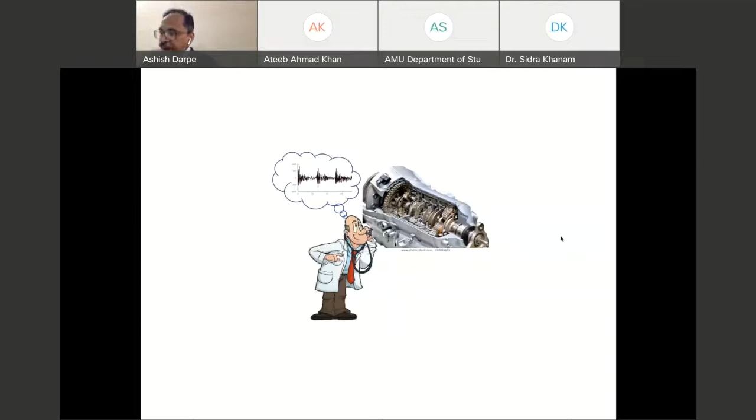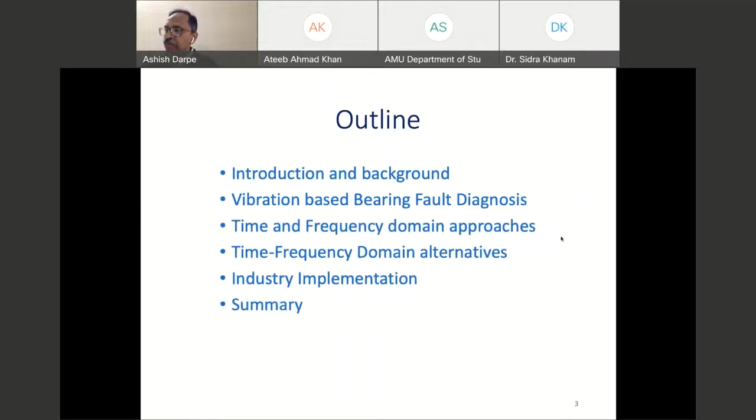I would like to upfront acknowledge two of my best students who worked in this domain and have generated such a wonderful know-how in bearing diagnosis: Dr. Piyush Shakya, who is currently faculty at IIT Madras, and Dr. Jaskaran Singh. Both of them have really put in excellent quality research work.

Okay, getting started with the introduction as to what basically the diagnosis of this element, the bearings—and in particular the rolling element bearings—is about. We will not be dealing with other types of bearings, but focusing mainly on rolling element bearings, for obvious reasons that they find application right from a simple electric motor to a rocket launch vehicle, a satellite launch vehicle. So it can be an important element in one of the most rudimentary or very simple electric machines, to a complex aerospace vehicle, aerospace structure. In the case of an electric motor, it is supporting the rotor, and in the case of launch vehicles, it could be a liquid oxygen pump or a liquid hydrogen pump, which is supplying fuel to the rocket, to the engine.

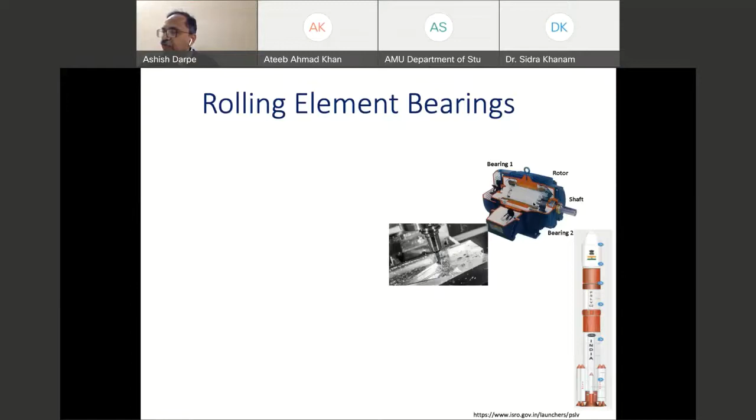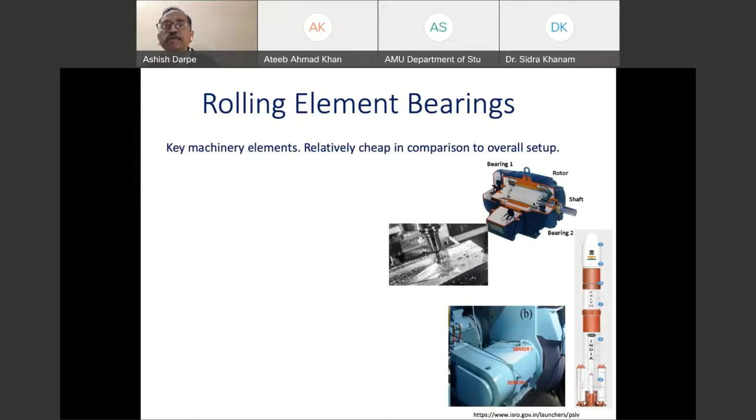It finds applications in the machine tool industry, like these two applications, the second of which we actually worked on quite extensively. In both of these, bearings form a very critical element, despite the fact that they are relatively cheap compared to the overall system cost. So despite being a key machinery element that isn't costly itself, its failure can be extremely costly for several reasons, which we will discuss.

The reason is that downtime is very costly in terms of time wasted and product quality degradation. For example, a bearing here, if it degrades, will degrade the quality of the machining. There will be a lot of errors, the machining quality will get hit, and you have more rejections. So even if it is not completely failed, it will influence product quality, which ultimately leads to added cost.

So this is one important reason for us to be careful about it.

The other important aspect of bearing failure is that if it goes undetected, it can lead to secondary damages. For example, if the bearings in an electric motor seize or stop working, it can have consequences with the coupling getting damaged, the shaft getting damaged, and so on. If one component in a complex interconnected machinery fails, it has consequences, and therefore it can be extremely damaging.

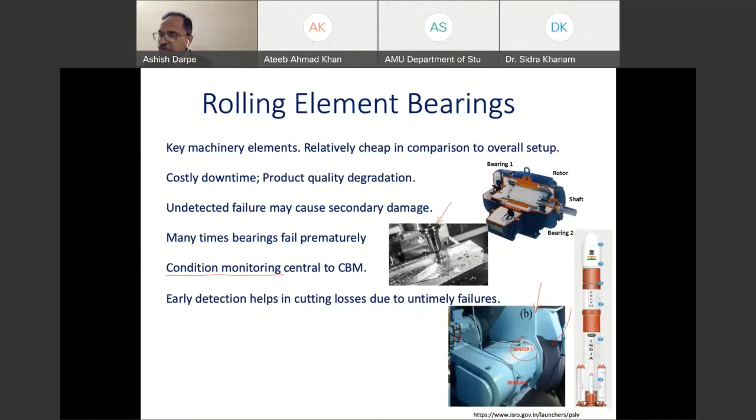We have seen that even a small scratch or a small spall can lead to a changed vibration behavior. In one of the industries we were interacting with, the bearing clearance, because of wear and degradation of the raceways, if it increases from 3 micron to 5 micron, they change the bearings. Such is the level of accuracy demanded that any small deviation from healthy condition must be detected in time.

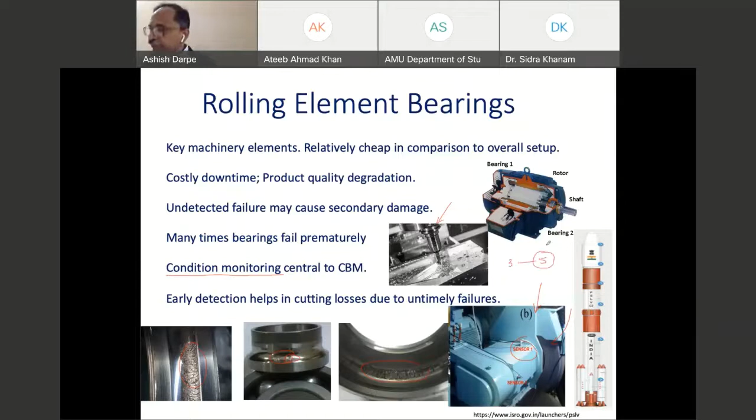So these are some of the failures that I was talking about. These are the actual pictures of the failed bearings from these machine tools.

When the cutting fluid in the coolant, during the grinding operation, enters into the raceways of the bearing, it eventually damages them by reacting with the existing lubricant and degrading it, finally causing damage to the raceways. The lubrication that is expected and designed for gets compromised, and then you have a failure. Sometimes grinding dust enters into the raceways, and even a small quantity of this foreign material is good enough to cause serious damage, leading to small pitting in the bearings that starts and extends toward all areas of the raceway.

The raceway, anyway, is a highly stressed component in the bearing, and if it starts degrading, you can imagine what will happen gradually—the entire raceway gets spoiled.

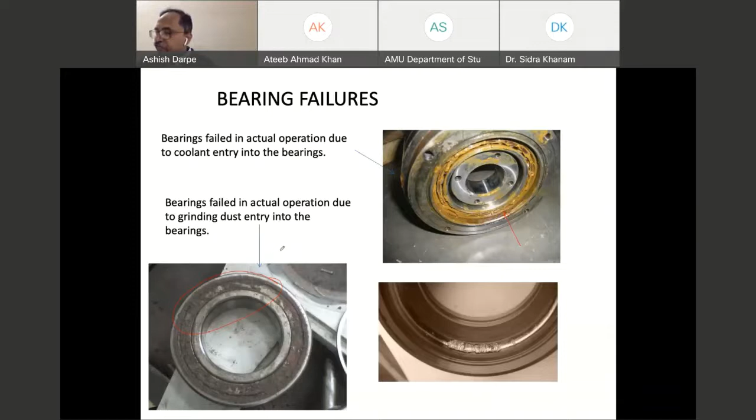One of the challenges currently faced is that if one of the bearings fails in this particular drill head, there is no way to understand which particular bearing needs to be replaced, and they end up spending a lot of time figuring out which one to replace. If they replace all of them, the remaining good bearings are unnecessarily thrown away. So if you are able to diagnose which particular bearing is at fault, it would be a great help in cutting down replacement time and cost.

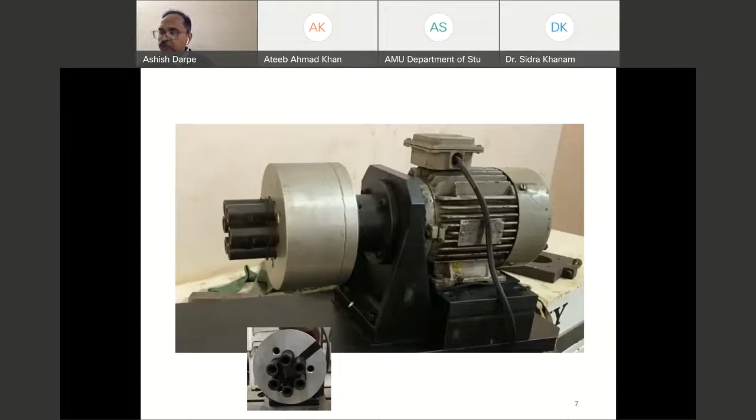So this is one of the examples that tells you how important it is to have an idea about how to diagnose.

Well, we now look at what are various condition monitoring parameters. That means when you want to monitor it, how do you monitor it? What physical parameter do you use for monitoring the bearing health?

This generally applies to most machine elements, not just bearings. You can have an aural indication—meaning you can listen to the machine element or machinery. There are many times aural indications: you hear the sound of the system and can detect whether there is an abnormal sound, a changed sound pattern, or behavior, which can lead to detection of an anomaly in the system.

In case of bearings, particularly in automotive garages, the mechanic listens to your vehicle and can tell if there is a changed sound pattern. With experience, he can immediately catch whether the bearing is at fault. In fact, if the bearings are degraded to a sufficiently high level, even a layman can figure it out. So there's nothing great about it, but if you want to catch it early, expertise is definitely required.

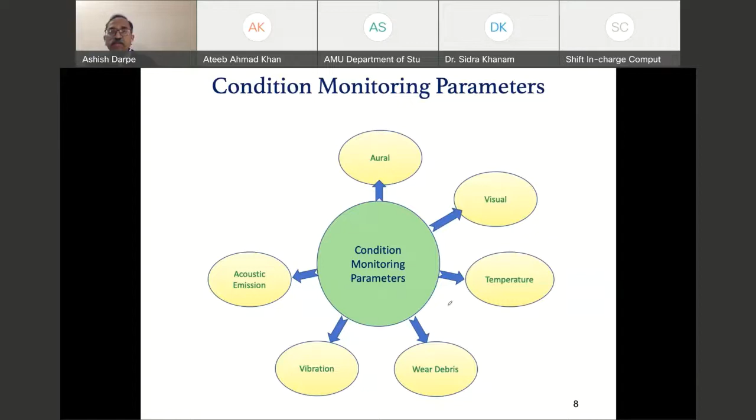So there are issues with this, but then articles will vouch that they are better than vibration parameters. So those are also the options available for you.

Finally, although I am putting this as one of the parameters, it may not be so relevant with rolling element bearings, but as a general condition monitoring parameter, operational variables can also indicate issues. For example, if you are monitoring the health of a pump or a compressor, the outlet pressure, temperature, or the power delivered are operational variables. Changes in them can indicate some anomaly in the system.

But as far as bearing health is concerned, these are the major parameters of interest. And out of that, if you look at the overall convenience, cost, and the sensitivity to a small change in the damage level, vibration is almost like a de facto parameter.

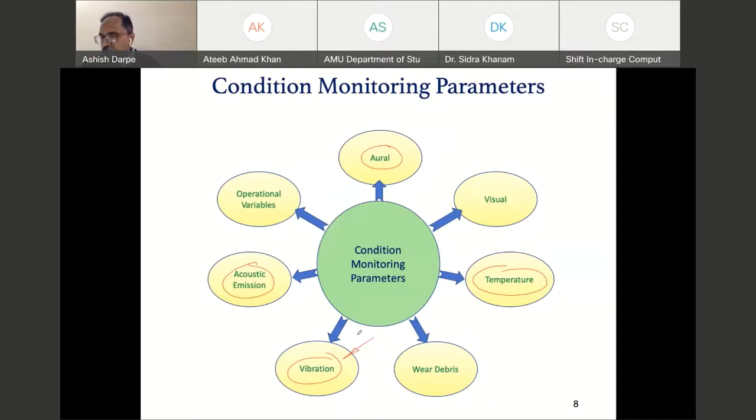Nowadays, sensors can be as cheap as 20,000 to 25,000. And despite the initial investment, they are so well established that they are long lasting and can survive the industrial environment, giving excellent output and sensitivity.

So having discussed why vibration is an important parameter to monitor the health of the bearing, I would like to dig a little deeper now and understand basically why vibration is something which is getting changed here.

So I'm trying to draw a parallel with a vibratory system, and we'll take the simplest machine, which basically has a bearing on both sides of the rotor. The rotor is basically supported on two bearings.

If we treat this rotor as a simple vibratory system, which we typically model like a spring-mass-dashpot system, why should minute changes in the bearing health change the vibration pattern?

Typically, if you model this rotor and bearings as a vibratory system, wherein the shaft and the rotor can be modeled as a mass, all those who have done a basic course in dynamics in mechanical engineering will agree that it is a simple spring-mass system, or can be modeled like one, with the stiffness here representing the bearing stiffness.

If the bearing is having some stiffness, that stiffness can be the bearing stiffness. Damping can arise out of the shaft internal damping or the fluid in the bearing. Of course, it is well established that bearings offer very little damping, but as a matter of completeness, this spring-mass-dashpot system representing the rotor supported on bearings is shown here.

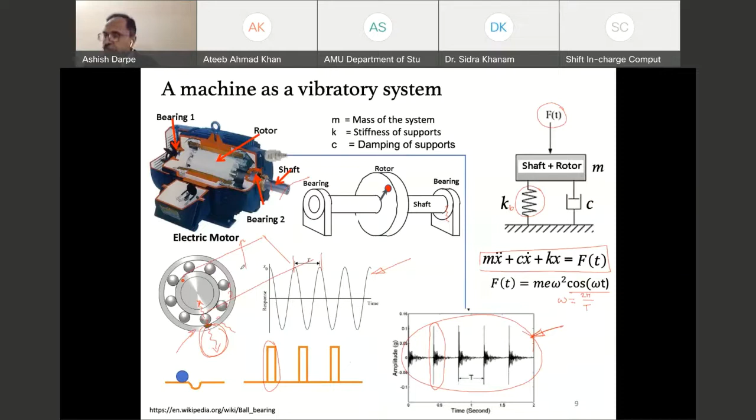Now the question is, suppose we also need to look at whether the fault is in the outer race, the inner race, or in the ball. You may check that this star you see on the outer race, if it represents a flaw in the outer race, as the balls roll past this flaw, there will be repeated impulses in the response, captured by a sensor put here. Or if the flaw is here instead, then as the balls roll, they will also interact with this.

And if you notice the frequency, the frequency with which this defect interacts with the balls is going to be lower compared to when the flaw on the inner race interacts with the rollers. That can be geometrically proved. In fact, there are expressions derived which tell you how much would be the frequency of repetition of these impulses when the defect is in the inner race versus the outer race.

So there are more interesting things between inner and outer race. Although theoretically, whether the defect is in the inner race or the outer race, if the defect is of equal magnitude, you expect to have a similar level of impulses generated.

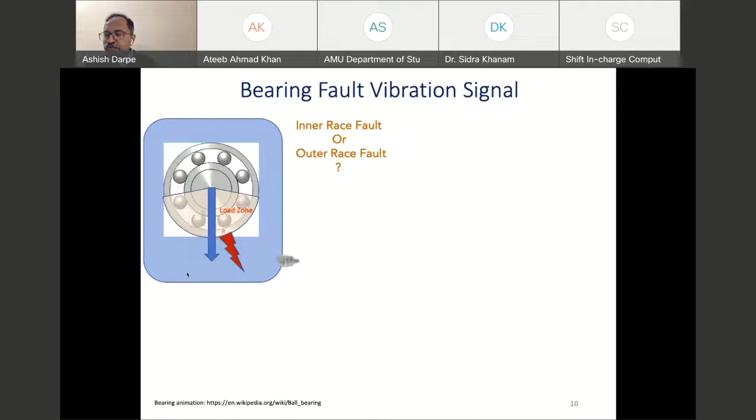So if the defect is on the outer race, because the outer race is fixed, and it is in the load zone, it will generate significant strong impulses. You may imagine that balls which are already compressed and stressed to a large value, as they pass through this defect on the outer race, with a sensor sensing the vibrations of the bearing housing, it will record impulses equal in amplitude, because the position of the defect is at the same load, and therefore you expect almost similar strength impulses.

However, imagine that the defect is moving with the inner race as the inner race rotates. Again, that is one of the most common things, that the defect in the inner race is rotating, because the inner race always rotates, while you typically always have the outer race fixed in the frame. So in this case, when the inner race defect, which is moving, is in the load zone, you get strong impulses generated.

But when this defect moves up and interacts with balls which are already relieved, it will generate a very low or no impulse at all. So compared to the strong impulse, you'll have a much lower impulse here, and that lower impulse sometimes may not even be generated, giving a situation very different from the outer race. So typically, because of the movement of the defect from the load zone to the unloaded zone, the impulses in the unloaded zone are much feebler compared to the impulses in the load zone, if the defect is in the inner race.

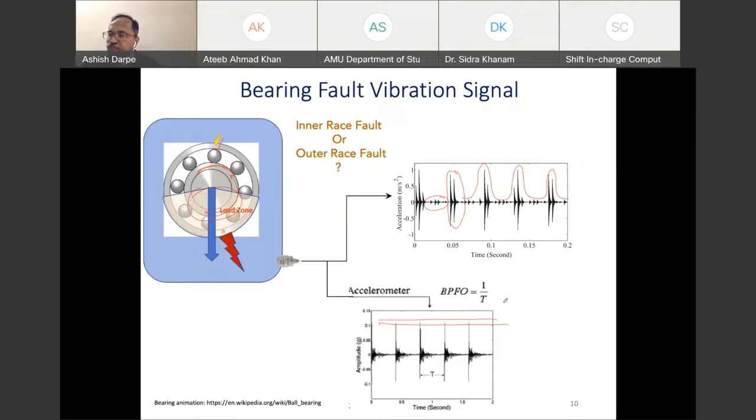Now, what are the various identification measures? We have been thinking about what is causing vibration to generate. The bearing, rolling element bearing elements interact with the flaw, and that generates impulses. Those impulses occur periodically at a definite interval of time, and all that can lead to a specific vibration signature. That signature needs to be tracked and identified from the overall vibration that is generated.

You must make a note that when you put an accelerometer on the frame of the motor, it's not that you will get a pure signal. It will also catch in parallel, simultaneously, other vibration sources, like the frame itself vibrating at its own frequency, and so on. But if you know the signature, you can extract those features.

Now, what are the metrics which we use for identifying problems with the bearing? One of the most simple ones is to find out from the time domain data the RMS value or a peak-to-peak value of the signal. We will discuss that in the next slide. There are other parameters like crest factor and kurtosis, which can be used for tracking the health of the bearing. We'll discuss that again very shortly.

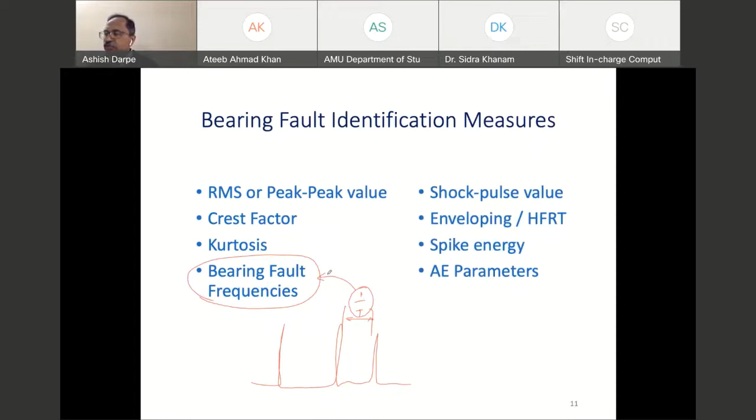So when you want to analyze the vibration signal, you can use different techniques for its post-processing and representation, so that the diagnosis becomes easier. You can unravel, dig out, or extract features very specific to bearings, removing some of the other parameters or influencing sources. So the most common one is the time domain, of which some of the parameters like RMS, peak-to-peak I have already mentioned.

So if you want to find out the metrics from this time domain data, maybe I will figure out what is the peak-to-peak value of this time domain data, or I can find out the RMS value of this time domain data. I can also find out the kurtosis value and so on. There are many other parameters which are typically used. That identification is relatively much simpler than the other parameters shown here in this picture.

Because if you want to convert this time domain data into frequency domain data, you need some algorithms to compute it. Although not rocket science, you can always do it using standard codes available. The reason for getting frequency domain data from the time domain data is some issues with the time domain data - it does not offer you detailed insight into what is the composition of this time domain data.

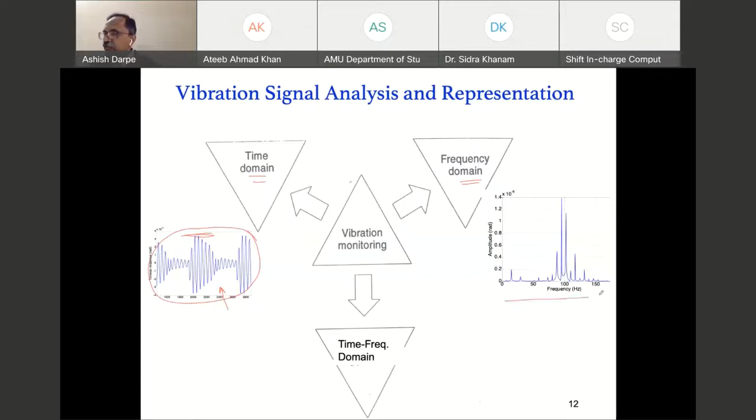It only tells you the overall level of the signal - how much is the strength of the signal as such. But if the signal changes slightly, it is hard to figure out what is the culprit or what is changing it. However, if you represent the same signal in the frequency domain, you precisely know which frequencies are there.

So the kind of repetition rate that I talked about of the repetitive impulses is directly linked to the kinematics of the fault. Therefore, if a specific frequency like 1 by T is present in the signal - for example, if this frequency represents the defect characteristic frequency of the outer race - I know that there is some issue with the outer race, and if this amplitude grows over a period of time as I keep tracking, then I can be sure that there is something wrong.

Now, if there are other more dominant frequencies present in the signal, which are typically not related to the defect and will remain static, even if this changes by 2 times, the overall peak-to-peak value may not change as much. Therefore, it would be difficult to track the progress of certain high-frequency components. And therefore, frequency domain technique is important for us.

The reason for this is because the fault signature, as we call it, is typically through this frequency composition. And if we have specific frequency components shown up in this frequency domain data, then identifying a given fault becomes easier.

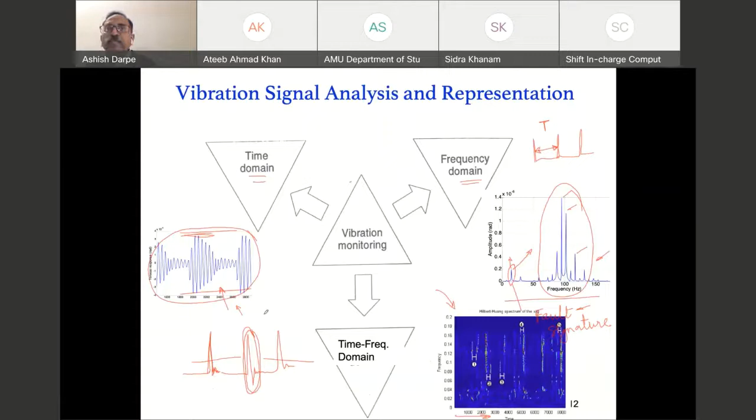As I said, a typical time domain data from an actual machinery is shown here. We can see that apart from knowing the peak-to-peak value of close to 6, it really does not offer much information, except that there is impulsive data in it, but it's hard to extract any further information.

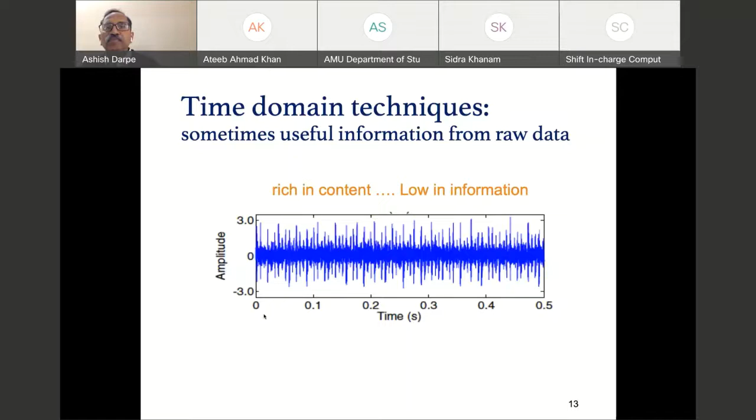So typically what is talked about in the literature is the time domain data being the raw data. It is rich in its content. It has all the information hidden, but that information is apparently not obvious from only the time domain representation. So we need to process this into other domains to extract useful information.

So the output of processing this time domain data to extract some metrics to quantify the signal is like this: you can use the expression for the RMS, and all of you are aware of how to find the RMS value. This is the root mean square value of the signal, which overall quantifies the energy level of the signal. It can be a useful parameter to track the health.

In our lab, in one of the units where we first started exploring vibration data for health monitoring, running that rig for a long duration in the heavily loaded condition resulted in the RMS showing this kind of a trend. So the simplest of these parameters that you can think of in bearing health was able to show a reasonably upward trend before the bearing actually almost failed. It can be used for tracking the health of the bearing, except that for more than half the period, it stayed almost close to a static value.

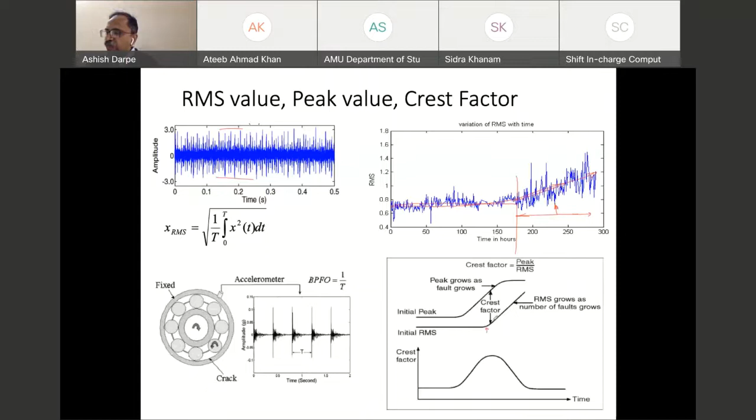It has been found that if you track the peak value, it grows faster than the RMS. So if you take the ratio between peak and RMS, that ratio, or magnitude, becomes higher at a much earlier stage than what RMS shows. RMS grows as the number of faults grow, and the peak grows faster. This ratio, crest factor, was touted as one alternative for early indication of faults in the system.

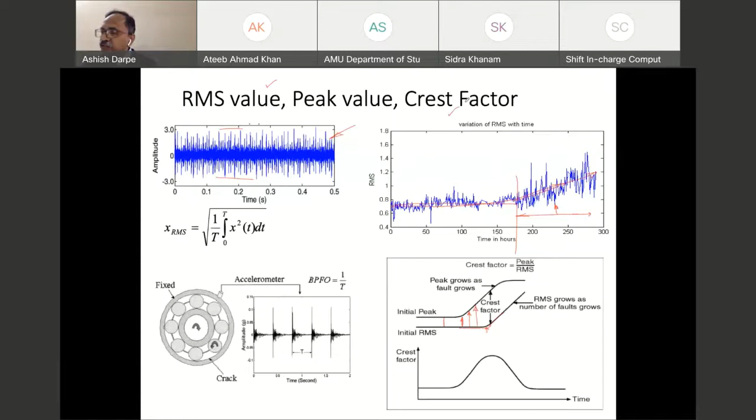So from the time domain, using pure time domain data parameters, you can use RMS, peak, or crest factor. These are the common ones. Another important parameter from the time domain data, without converting to frequency domain, is kurtosis. Kurtosis basically quantifies the peakedness or impulsiveness of the signal. If you have short duration spikes in the signal, it gets properly captured using kurtosis.

It's a statistical parameter, a fourth order moment. You can find this out by taking various samples of the response at different instants of time, and taking the fourth order moment of the deviation from the mean value, normalized with the standard deviation.

This particular parameter captures the impulsiveness, and therefore can be used for faults such as localized faults or characteristics in the bearing. Because such localized faults generate impulses in the time domain waveform, this parameter is found to be theoretically much more sensitive compared to RMS or peak values.

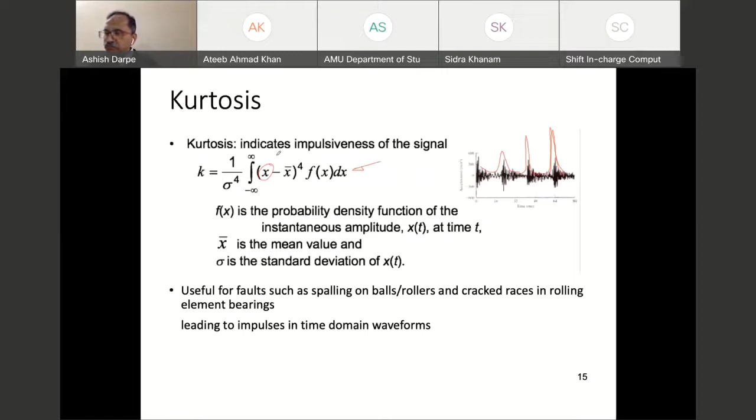Theoretically, one can show that this value is less than 3.5 for bearings with normal signal, and the moment the peaking starts, it deviates and goes beyond 3.5 for flawed bearings.

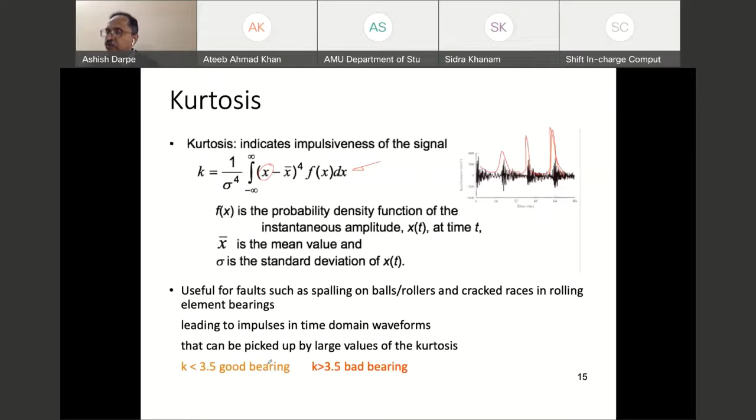However, one of our students, Dr. Jaskaran, has shown through simulation that all is not really perfect for kurtosis, because it also depends on several other factors and can give erroneous interpretation. For example, if I take a single impulse for the entire time duration, the kurtosis value is almost close to 191. If you have these impulses repeated in the same time span, the kurtosis drops to 20.5.

So there has to be a distinction between the number of impulses, and the time sample should be properly taken. If you have double the signal level, meaning the impulse has larger levels, you don't gain much in the kurtosis value. The peak amplitude growth does not really respond in the kurtosis.

If one of the impulses has a sudden change, maybe because of shock loading or other disturbances, that completely changes the kurtosis value. This signal and this signal are identical, except one of the spikes has grown to double or a slightly higher value. With one of the spikes almost double the amplitude, the kurtosis suddenly changes.

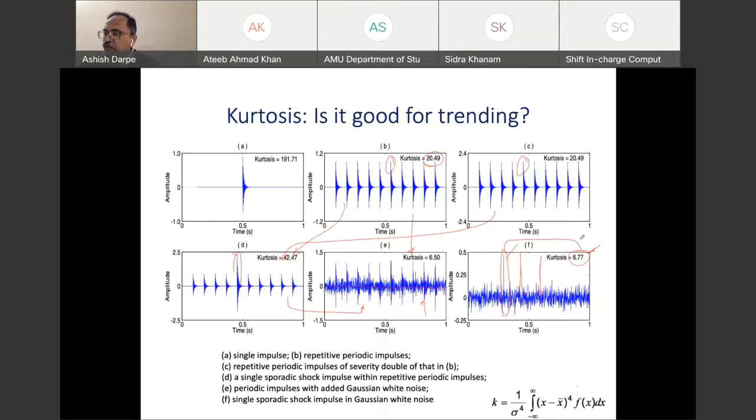So these are some of the issues with kurtosis, and it should be carefully used. But otherwise, theoretically and fundamentally, it is a very nice statistical measure of capturing the peakedness or impulsiveness in the signal. The only thing you need to do is take care of possibilities where the values can get skewed. One possible alternative is to clean up the data, and also take average values over a longer period of time, so that sporadic impulses or other disturbances are averaged out.

In one of the literature, experimental data showed that although the peak-to-peak vibration value gradually increased, kurtosis showed a much steeper, more sensitive evolution. But at the same time, as we discussed, it started dropping after a certain level of damage. So it's not a monotonous indicative parameter.

That actually dropped as time progressed. This is because if you have a small spall, crack, or other anomaly on the track, as long as it's a localized fault, these flaws initially generate very large impulsive signals. But in bearings, the sharpness of these edges will eventually get tapered off, and you might not generate as strong and sharp impulses as in the initial phase. As damages wear out and become less sharp, or become distributed across more locations, the kurtosis value will eventually decrease from a higher value. The literature has shown this through experimental data. So you need to be careful in using kurtosis.

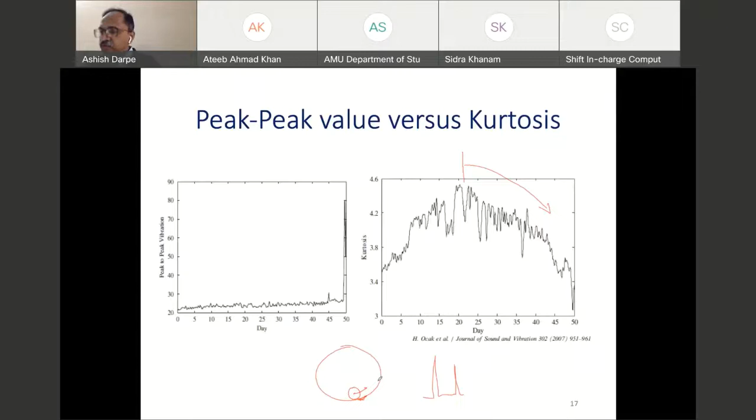Then there's the alternate spike energy measurement, also known as the shock pulse method. The idea is that these impulses generate sudden impulse excitation to a vibratory system. The housing in which the bearing is housed is itself a vibratory system, because this entire box has certain mass and stiffness. Not only do these impulses excite resonances in this housing, but the sensor sensing the vibration can also respond, since a vibration sensor itself is a vibratory system.

This vibratory system has a higher natural frequency, more than about 20 kilohertz. These high frequency, very short duration impulses excite resonances either in the supporting structure, the housing of the bearing, or in the accelerometer itself. So what's typically done through these measurement approaches is they filter out all the low frequency components related to rotation effects or other non-linearities. Low frequency data is filtered out, and you keep only the high frequency regions, which could be several kilohertz. All general rotational related frequency components are less than 2 kilohertz, and often within a few hundred hertz.

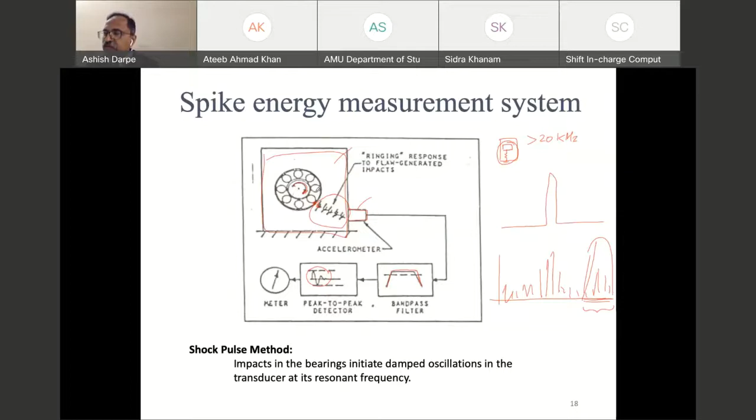For example, 2400 RPM corresponds to 40 hertz of signal. If it's rotating at that speed, the unbalance in the blower will generate a certain unbalance-related excitation frequency, related to its own operation. If the bearings supporting the blower rotor are loosely mounted, that will generate a signal typically at twice the rotational speed. If the blades have issues, the blower will generate what's known as blade pass frequency. So certain time domain data will have its own frequency characteristic. If the bearing is damaged, a damaged bearing will have its own specific frequency signature.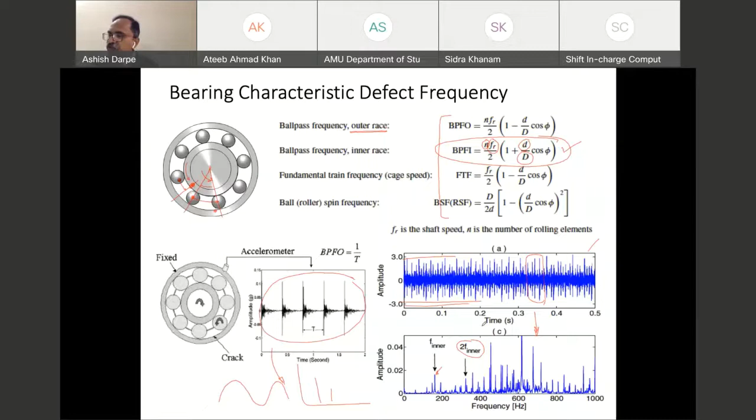So from the time domain data, by using frequency domain conversion, I can get the picture clearer as compared to what it is in the time domain. And then if I keep tracking the amplitude of this frequency, I can, over a period of time, check whether the defect is growing or is static, or how it is progressing. Based on that, I can take a call on whether the bearing is further degrading or not.

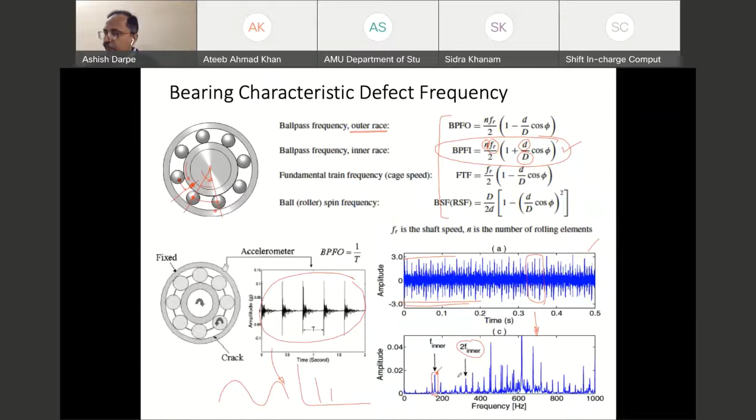So this is another data that I have taken from one of the test setups.

So as I said, from the time domain data, I can definitely get some idea about whether there is a healthy condition in the bearings or not, and also understand if there is an issue here. Interestingly, despite such periodic impulses, the defect has not really resulted in a very strong defect frequency. So its components do appear, but relatively low in their amplitude. So getting the frequency domain data itself may not always help.

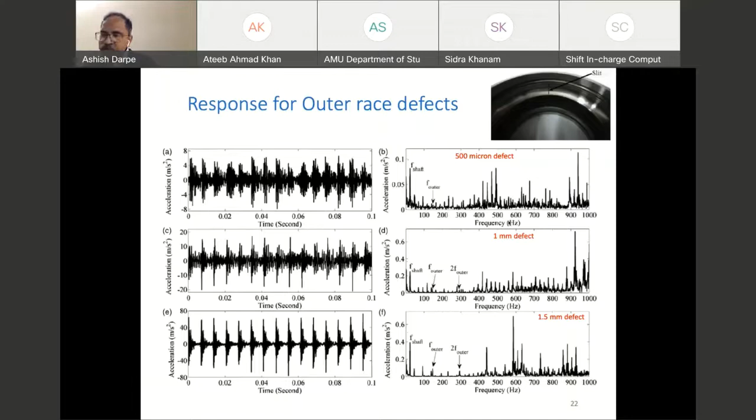And that frequency domain of this envelope signal gives me a very distinct, clear presence of the outer race defect frequency. You can see how clean the frequency spectrum looks, in contrast with the very polluted spectrum which had so many frequency components. The actual defect frequency gets buried in that signal. So using this high frequency resonance technique, I get a much clearer picture and better information of the defect in the bearing. That's what I have got here.

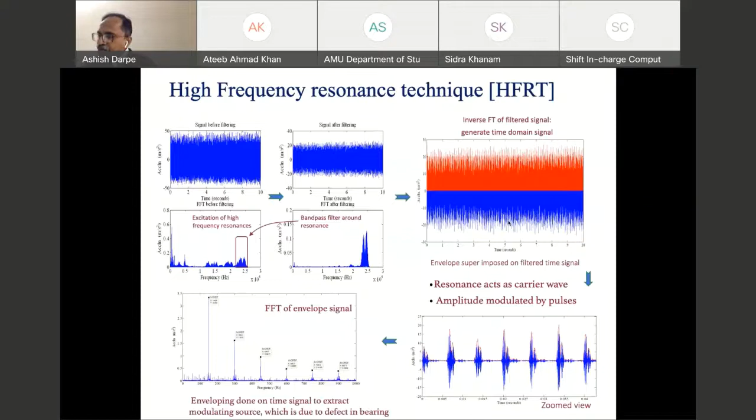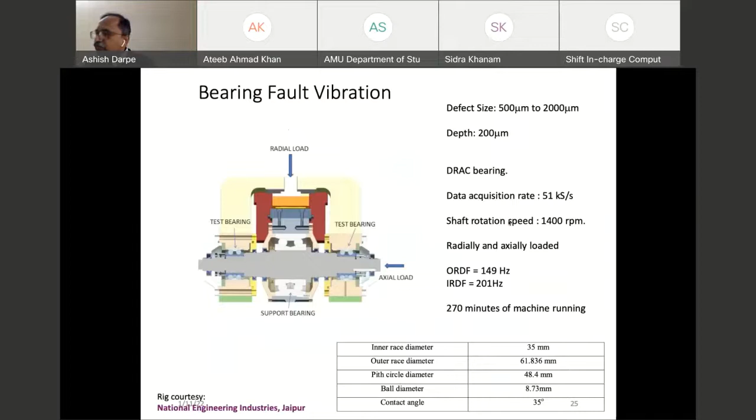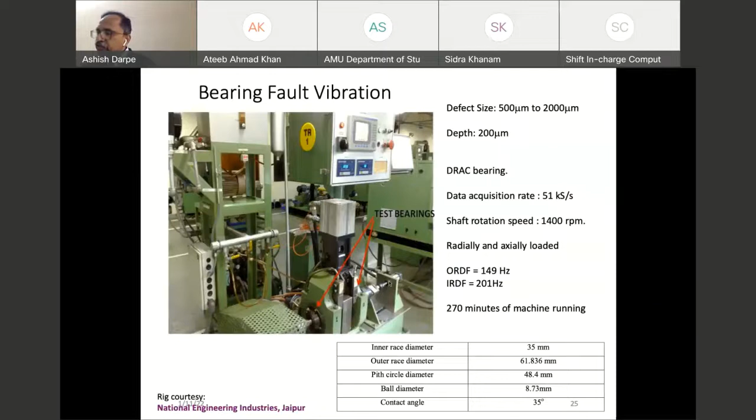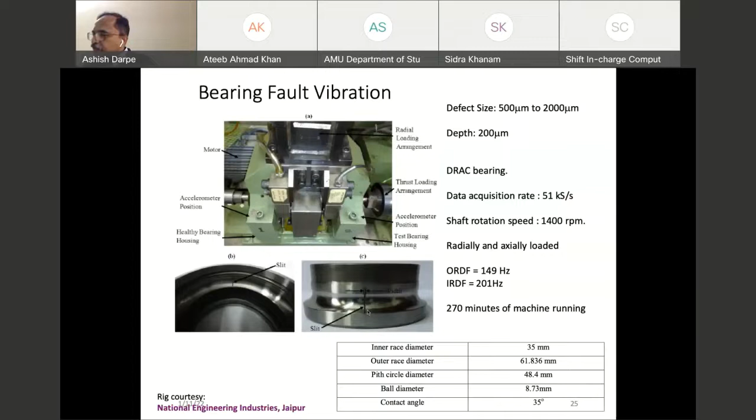Okay, so this is what is known as HFRT, or the enveloping method. Now we applied this enveloping method to actual test data, working with one of the industry bearing manufacturing companies, using their accelerated test setup for seeding defects in measured quantities so that the output can be correlated to the defect size. These bearings were placed in housings and tested, with vibration sensors placed, and defects seeded in measured quantities, with different levels of damage tested, for both inner and outer race defects.

Then you can get the data. So we first started with time domain parameters. You can see that as the damage size increases, there is a gradual rise in the RMS value. The RMS value does show a rise as the damage increases, but the initial change is very marginal, and only with very large values does it pick up. The same happens with kurtosis.

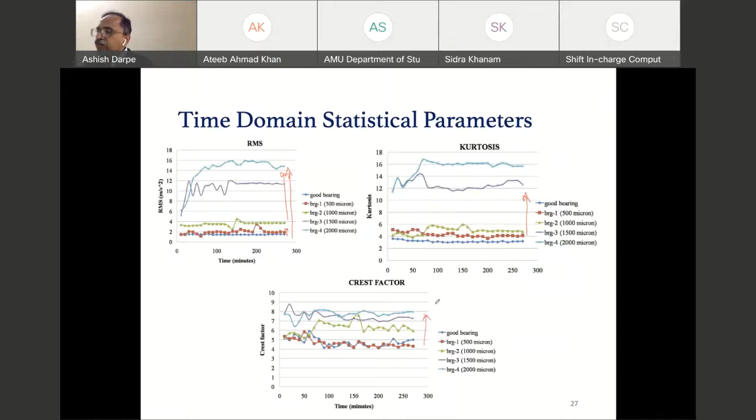It grows a lot. Crest factor was not so significantly changing, but it was also plotted, and you can see that as the damage increases, there is a distinct increase in its value. So the time domain data also can be used. How sensitive it is, it's a matter of question.

Now, we also looked at the frequency spectrum of the healthy bearing. Every time, if you only look at the defective bearing, it can lead to incorrect interpretation. You should always keep on comparing it with the healthy bearing. So this is the data, the frequency domain data of the healthy bearing. What you notice here is...

Many harmonics of the rotational frequency. This is the rotational speed related frequency. Harmonics of them do appear in the spectrum. It is expected in reality. The bearing itself is a highly nonlinear element from the vibration viewpoint, so there will be some higher frequencies which will always generate.

But the defect frequency, except the outer race defect, is not expected, and it does not appear. So these are the spectrum for the outer race defect in the full span, 0 to 25 kilohertz. Let me just tell you, the outer race defect frequency was close to 150 or so. So that is really not there in the outer race defect, in the healthy condition. No defect frequency appears here.

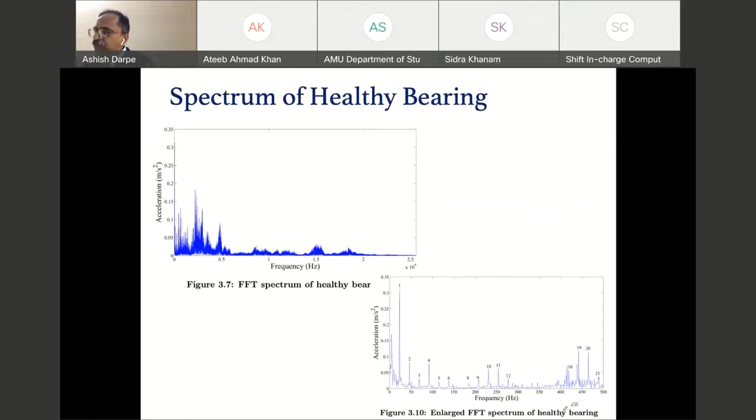When we change the defect size, look at these progressive increases in the defect size. What you can notice is all the y-axis limits are identical. What can be noticed very clearly is the energy at high frequencies is almost non-existent here, and there's a very large resonance region here. So the energy slides into the high frequency region as the bearing deteriorates. This has been mentioned in the literature, that higher resonances are excited as the defect grows. You can see that gradual increase in these high frequency regions is quite well noticed here.

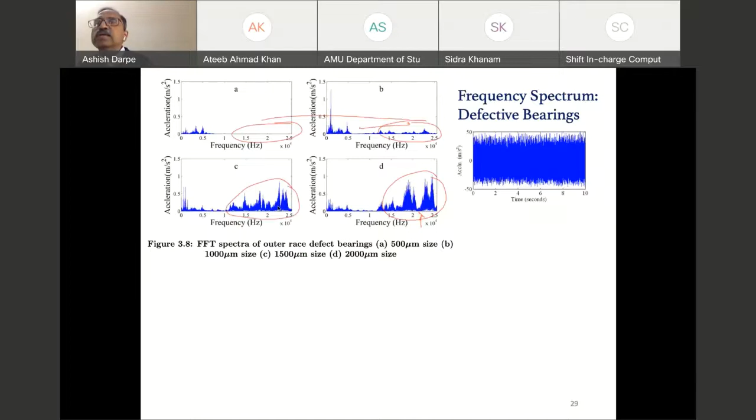And the same happens with the inner race as well. Therefore, HFRT can be quite nicely applied here, wherein you can identify these resonance regions and apply bandpass filtering and all subsequent processes.

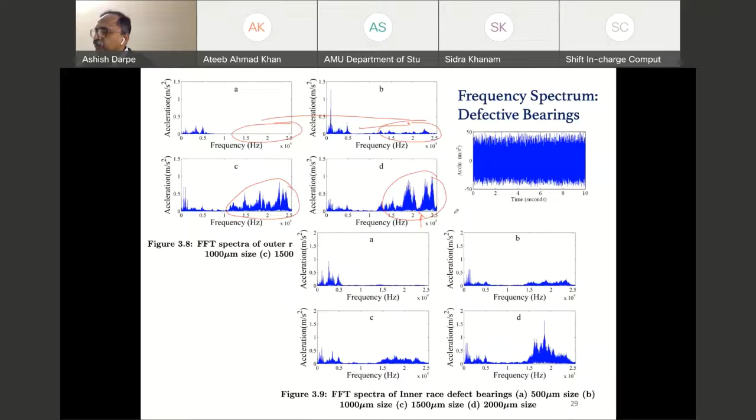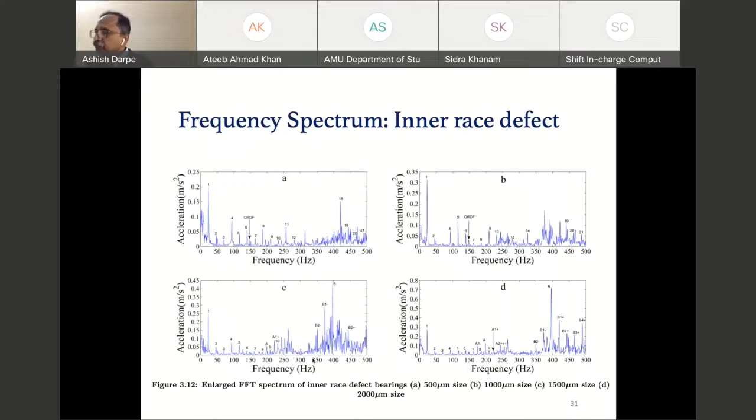Same is with the inner race. You can see that the inner race defect frequency, like this A, is appearing, but they are all of lower order of magnitude. This is something very interesting to notice, that in practice, the frequency domain data may not be as expected or as clean as you expect it to be.

For the inner race defect, we get reasonably clear data, but what we observe is that other frequencies also clamor for attention. But then you should also understand, as we discussed right in the beginning, that for the inner race defect, the impulses get modulated as the defect goes from the load zone to the non-load zone. What you are observing here is very rich modulation features, which are actually indicative of the inner race defect, and it's actually useful for fault classification also.

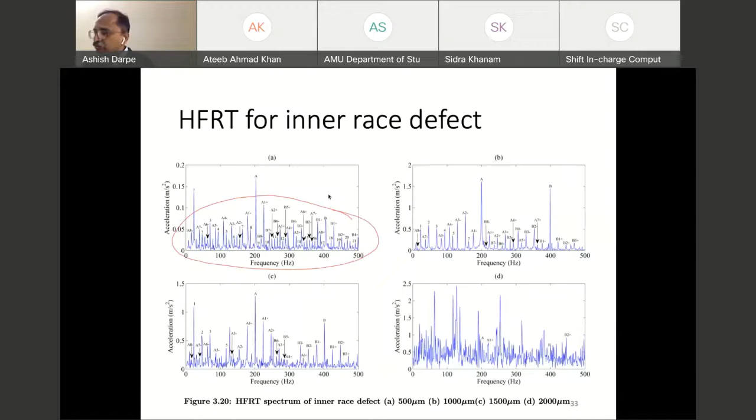So when I say inner versus outer race defect, for the same defect level, this is the difference between the outer race and inner race, which is actually because of this kind of modulation in the strength of these impulses in the inner race, and the absence of it in the outer race. This is something very nicely captured here from the actual experimental data on the lab setup. The modulations on the amplitude of these impulses, because of the migration from load zone to non-load zone, is actually reflected in the side bands which are created or generated.

So you have B minus and plus. This is the defect frequency, and this also is the second harmonic of the defect frequency. This is the first harmonic of the defect frequency, and this is separated by the sidebands which are due to the modulation. The difference between these two is the rotational speed.

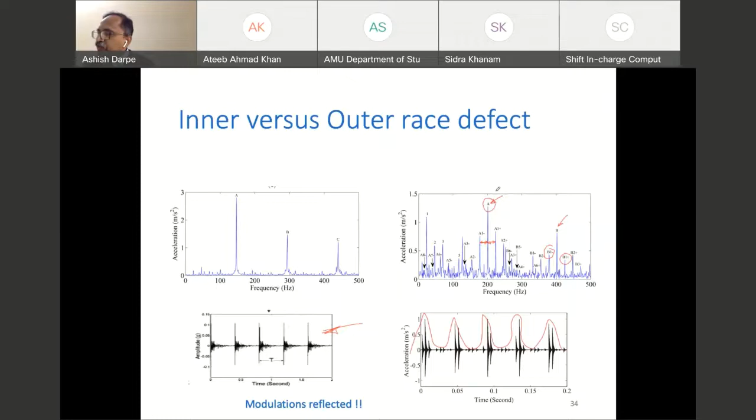The sideband generation is a very typical signature of the inner race. So from the HFRT data, you can actually diagnose whether the defect is inner race or outer race. Of course, the frequencies themselves tell us whether it is inner race or outer race, but the modulation character also is a second level confirmation that the defect indeed is the inner race.

Then we made a comparison of all these parameters we investigated for how sensitive they are to the defect size. So what we plotted is the increase or not of these parameters. We ran for a particular defect size, and we ran it for a large period of time so that we get a very large set of data for the same defect size, so that we expect a more or less equal value when we run it for a larger period of time. And as we increase the defect, we check whether this amplitude grows, so that we can say the parameter is sensitive to defect growth.

For that purpose, all these investigations were carried out. You can see peak and RMS, both of them are growing nicely with the defect. The crest factor is not as sensitive. Kurtosis, yes, it showed because all the time the defect was fresh. But the defect frequency from the FFT was not really sensitive, you can notice here. In fact, it dropped for very large values.

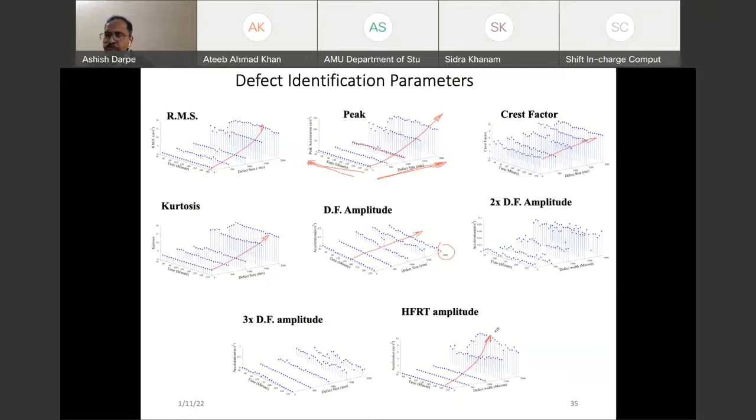But look at what is showing up for HFRT. HFRT was able to show a very steep rise as the defect grew, and by far we found that to be one of the best parameters to monitor. Then other parameters, as you see here, they are all there. For any detailed understanding or further reading, you may refer to this particular paper to know more about it.

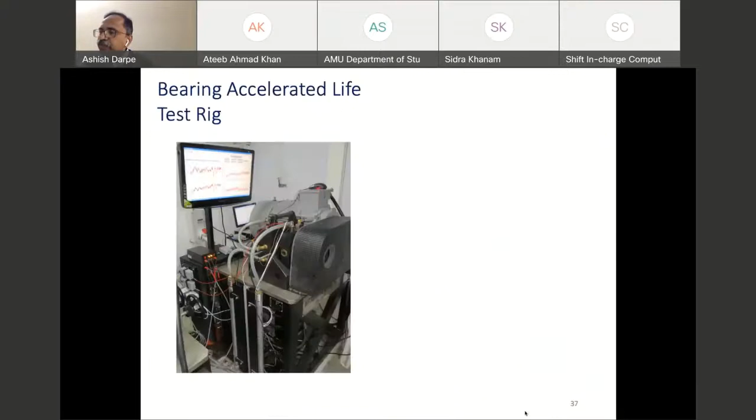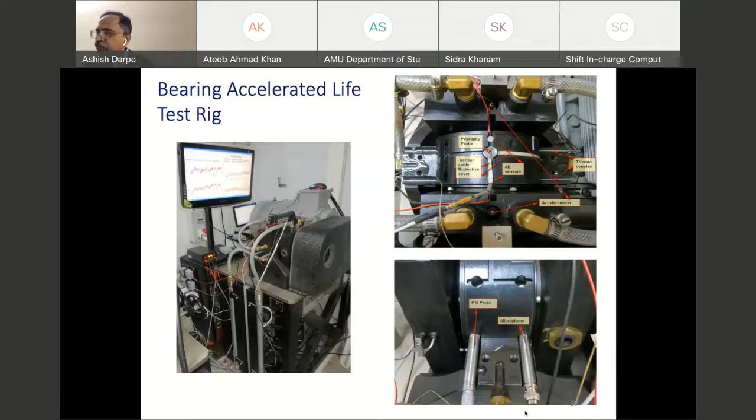Now, we did this lot of investigations on the bearing from a state-of-the-art test rig setup in the lab, wherein we used all kinds of sensors to extract the information. We also used data fusion techniques, so multiple data or multiple features like RMS, kurtosis, crest factor, defect frequency, HFRT data, and time frequency domain.

All of that can be fused using an approach called the Mahalanobis distance. Unfortunately, in this first lecture it is difficult to cover everything, but you can refer to our papers on the Mahalanobis distance. What we have shown is if you fuse relevant parameters into a single composite parameter, it gives you much better information about the trend of the degradation of the bearing.

So this is from this particular test rig. We ran to failure one of the bearings, and this is the data that we have. The RMS and peak values were not very sensitive or not showing up as much increase as compared to the Mahalanobis distance. So one can then start looking at alternate and more advanced level approaches to make the system much more robust and more sensitive to the defect progression.

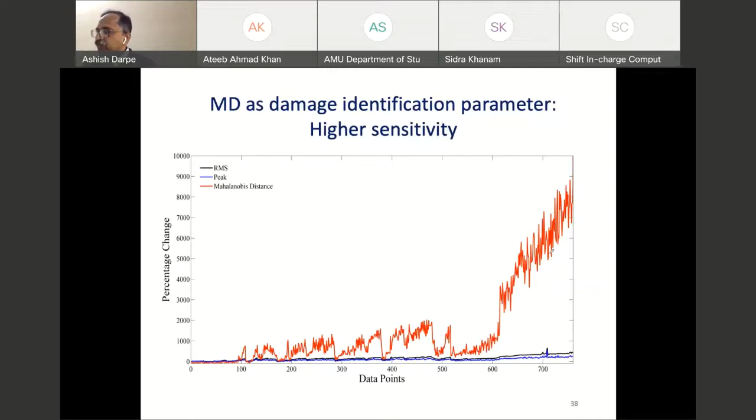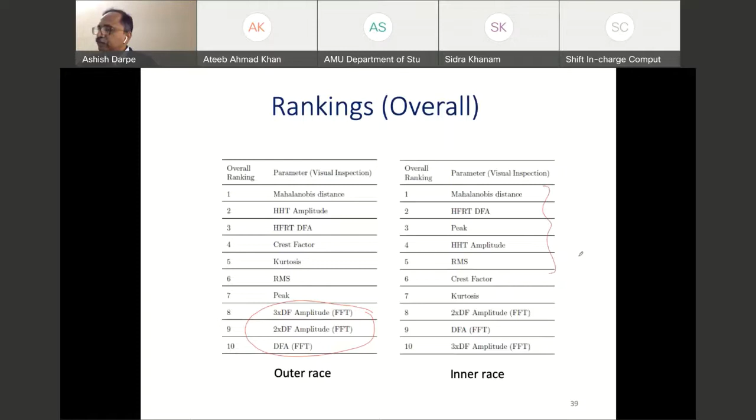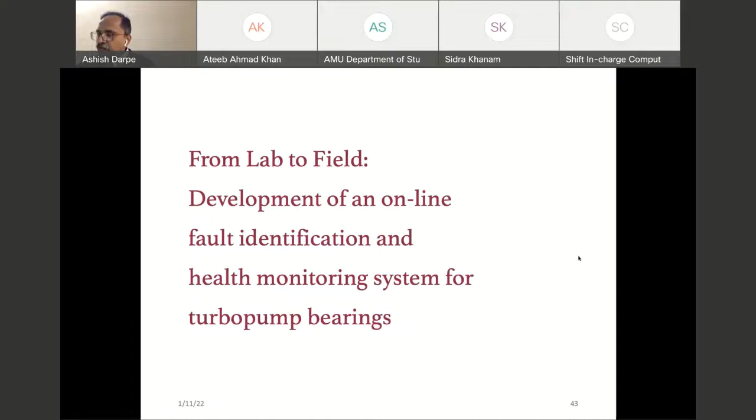So these are the confirmatory additional data sets, and that's something I will skip at the moment. We'll now look at the most important part of how we made use of these learnings to implement these systems in the field. One of them was from a funding agency in the defense and aerospace sector, who wanted to develop a diagnostic system for their turbopump bearings.

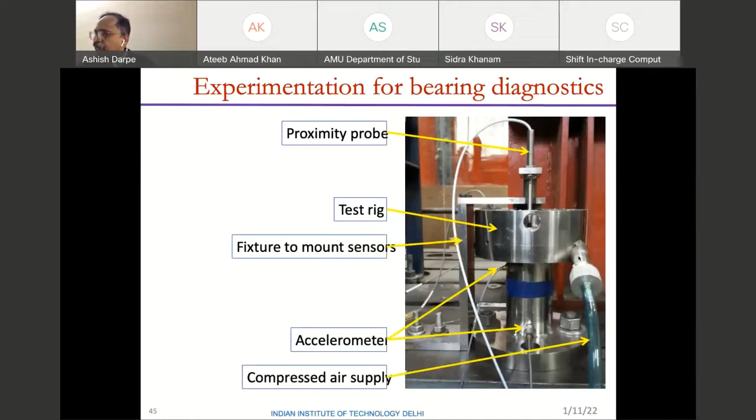So this is a prototype booster turbo pump, which was given to us to explore and develop this system. We set it up and took the data. A turbo pump of this kind operates in excess of 40,000 to 50,000 RPM, and you can see it was set up in the lab and ran with some seeded defects in the bearings, and the data was recorded.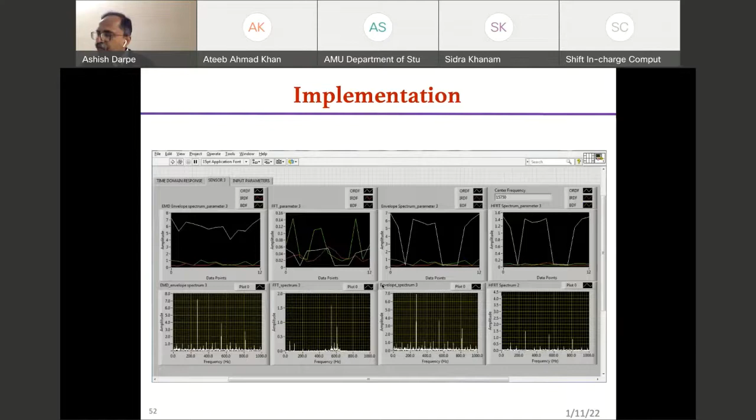We have shown that it is indeed difficult to extract defect information from bare FFT. So by doing alternate processing, we developed this front end for the diagnostic system, which was implemented in the field, giving multiple indications of how the parameters are varying in the actual setup. An online health monitoring system was developed and delivered to the user, along with additional software for processing the vibration data.

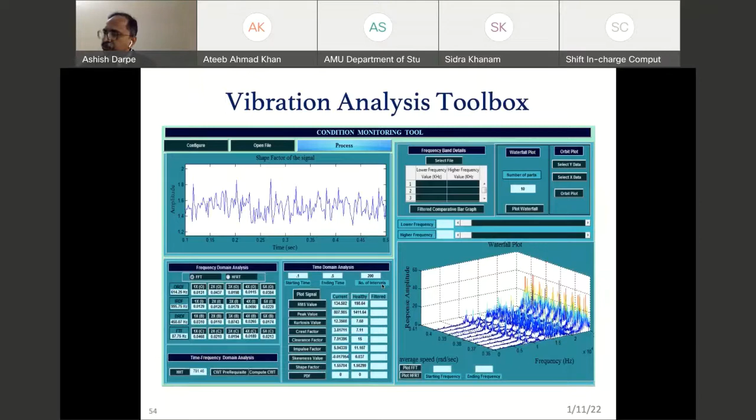The other fallout of this entire work was development of a bearing quality assessment system for one of the industry partners, wherein a fresh bearing, when manufactured, has inherent manufacturing tolerance related issues. That means the raceways, even if perfectly manufactured, will have waviness due to manufacturing tolerances, and other issues. These all lead to undesirable lack of quietness in the bearing, meaning there will be noise generated because of the waviness in the raceways.

So there will be no traditional or conventional fault in the bearing. The bearings will be perfect, but there would be waviness or roughness induced vibrations, picked up by sensitive instrumentation. They wanted to replace some of their earlier old machines, which were based on earlier technology. So we developed this entire measurement and processing system for them to assess the quality of the bearing by extracting and processing the vibration data.

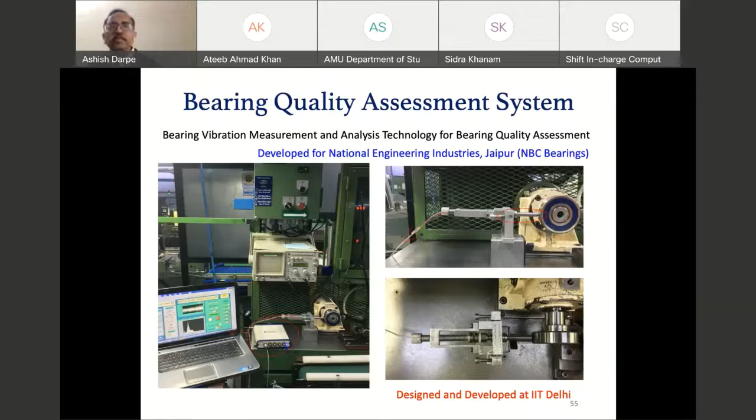So what you see here is a sensor tracking the outer race; as the inner race rotates, the vibrations of the outer race are picked up there. The signal goes to the data acquisition card and then to the computer, where the software developed for processing the data does all the processing and displays the entire diagnostics of the bearing in terms of RMS value, kurtosis value. Because these all generate higher frequency noise, we pass it through different frequency bands, extract band level values, and then do processing on that data.

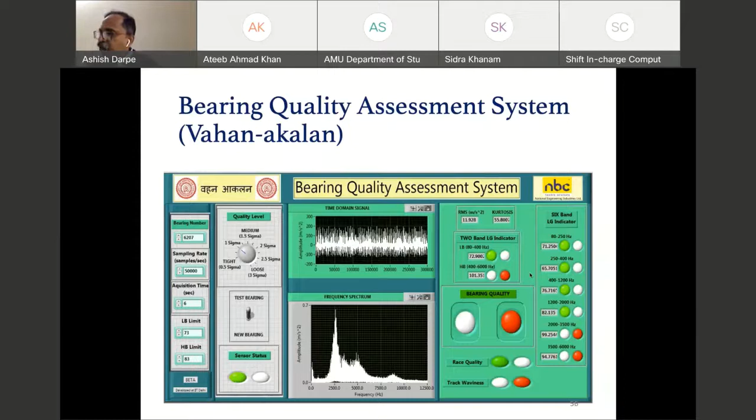If you want to change the bearing type, you can do that accordingly. It automatically calculates all the defect frequencies and other information. So all of that was actually developed and delivered to them.

This was one of the major projects where Dr. Shakya worked with us, and through his efforts we could develop our indigenous diagnostics and prognostic system with the industry partner developing grinding machine tools. All this sensor data is processed, and apart from diagnosing the current health of the bearing, we also developed life prediction algorithms and so on. All that was the culmination of the initial lab-based measurement and data analysis that we started with, resulting in good quality work.

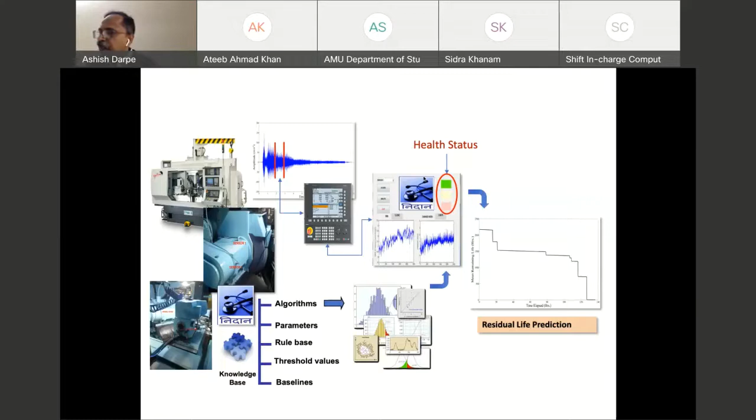So this was actually implemented and demonstrated in the actual machine tool. This is the front screen, how it looks, and it was also demonstrated and exhibited at an exhibition way back in 2016. So this is our bearing health monitoring system connected with one of the machine tools, a CBN grinding machine tool.

Okay, I think we have five minutes left. There was a topic on time frequency, but I would prefer that in the last five minutes, if there are any questions based on whatever we have discussed, it will be better than completing another small part. If there are no questions, I will continue.

Yes sir, there is a question from Anirban Mitra: is the amplitude on a combined time domain plot the sum of all the amplitudes?

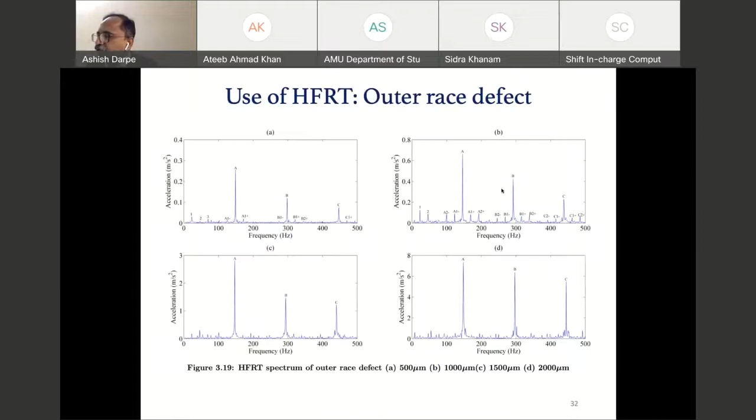Okay, I hope his question is answered. There is another question from Muhammad Atif Jamil. He said he's working in the area of fault diagnosis of ball bearings using machine learning, where the primary concern is classification of faults. You mentioned in your lecture that identification of fault type helps in mathematical modeling, but people often say that diagnosis, particularly classification of bearing faults, is not much significant since the bearing has to be eventually replaced once it gets faulty. So more emphasis should be put on prognosis and RUL. He wants you to comment on this.

Yeah, his point is right in the sense that from the industry perspective, this is often the case - people are not really interested in knowing whether the ball is at fault or the inner race is at fault, and so on. However, the comment I made was in the context of overall machinery prognosis, wherein if you have complex machinery containing multiple elements - for example gears, bearings, other components - then identifying which particular fault is referring to which particular element helps us in figuring out the whole system as a whole.